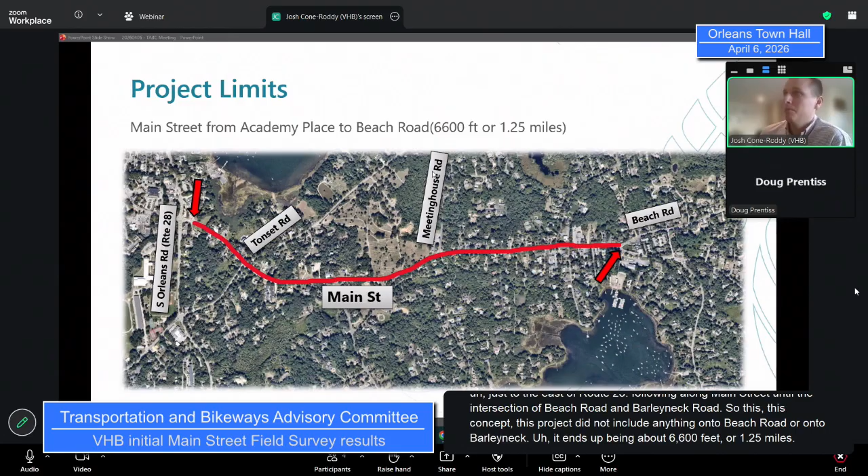A little bit of project status and history, since this has honestly been going on for a while now. We were originally hired back in 2021 to look at Main Street in this area. In 2022, we basically held as the town sewer project was ongoing and they were getting survey throughout the entire area for us to use, so we were waiting and staying pat. In 2023, we provided the three typical sections to the town. The preference at that time was to go with alternative 1.

We'll get to more information on these alternatives in a few minutes, but alternative 1 was the on-road bike lanes with the sidewalk on the north side of the roadway. Then in 2024, we revisited this with you all on the committee and progressed our alternatives analysis to include both alternative 1 and alternative 2, which is the sidewalk on the north side with sidewalk/path on the south. We also decided at that time to eliminate alternative 3, which was on-road buffered bike lanes. Last January, we submitted the alternatives analysis to the town. Later in December of 2025, the town hired VHB to go out, our survey department, to reestablish the right-of-way along Main Street, and then reanalyze the impacts based on that new reestablished right-of-way.

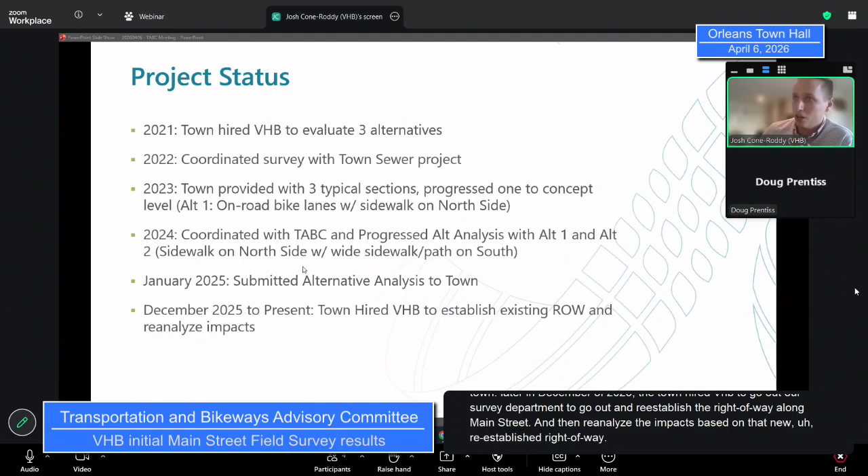So just a reminder what the existing roadway layout looks like - there is some variability along the corridor, it's not a perfect shot the entire way, but for the most part it's two 11-foot lanes, 3-foot shoulders, and some areas are smaller, some bigger than that. There's a 5-foot sidewalk on the north side of the roadway, but that's not continuous throughout the project study area. It's continuous for the western portion of the project, but becomes intermittent as you get towards the east, towards Beach Road. There's also a large amount of utility poles lining that north side of the road continuously throughout this mile plus.

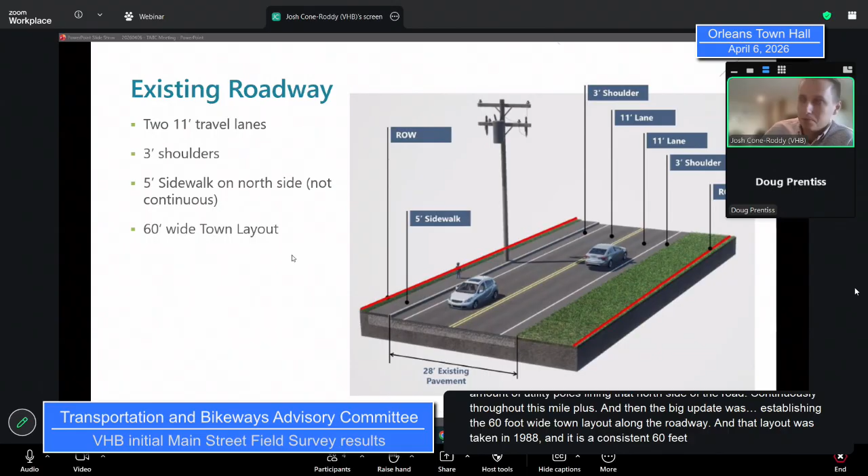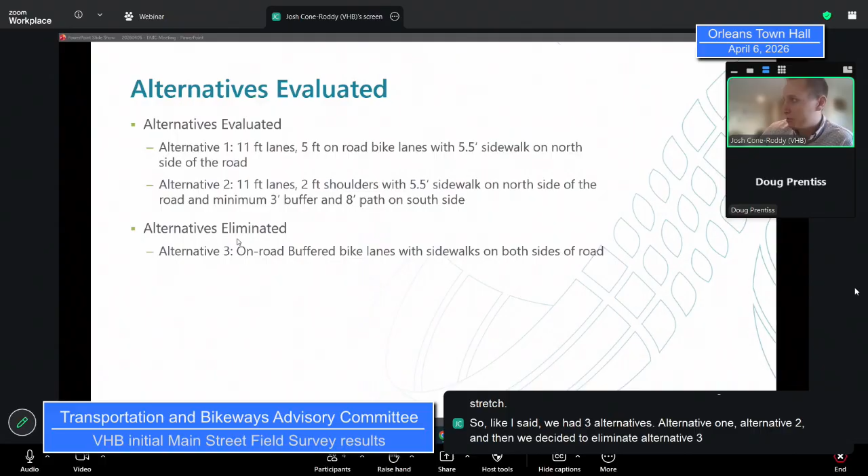And then alternative 2, which would be to condense that pavement down to 26 feet. So you're looking at 2 11-foot lanes, 2-foot shoulders on each side, keeping that 5-foot sidewalk on the north side, but then having a path or sidewalk on the south side.

What I show on the screen here is the preferred minimum when you're talking about MassDOT standards or design standards, that 5-foot buffer between the roadway and the path, and then a 10-foot minimum path. What I've shown previously, and what we continue to show on these graphics, is also a minimum path, which has a reduced 3-foot buffer and an 8-foot lane or an 8-foot path.

This would be used in constrained areas where we wouldn't be able to fit that full 15 feet. So any of the impacts that we counted for as part of the original alternatives analysis for right-of-way takings, tree impacts, or any other impacts, was based on that kind of minimized section, where we would use that rather than impact people's properties or trees where we could.

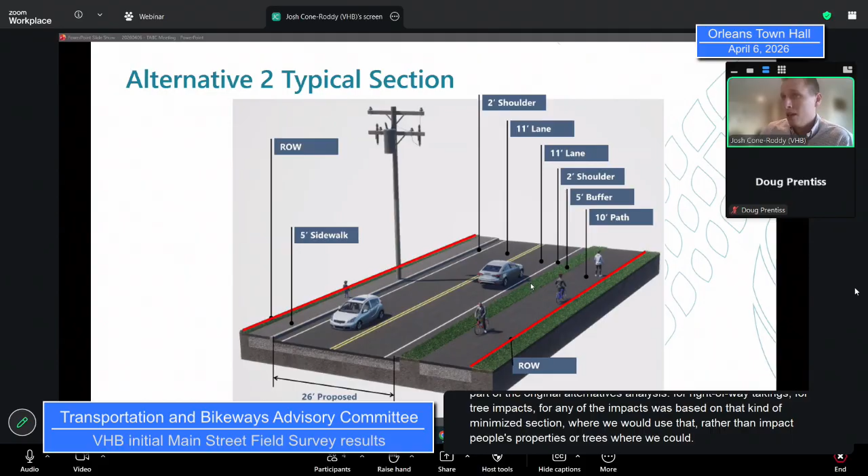So in December, we got hired. Our survey crews found some time throughout the winter, when there wasn't 5 feet of snow on the ground, to go out there and find the existing bounds and establish those bounds so that they could then re-establish the existing town layout in CAD for us to use.

For those of you who have been on this committee for this long, I've said over and over again that the GIS layout lines are sometimes spot on, and sometimes significantly off in one direction or another. So it's hard to give great direction off GIS layout lines.

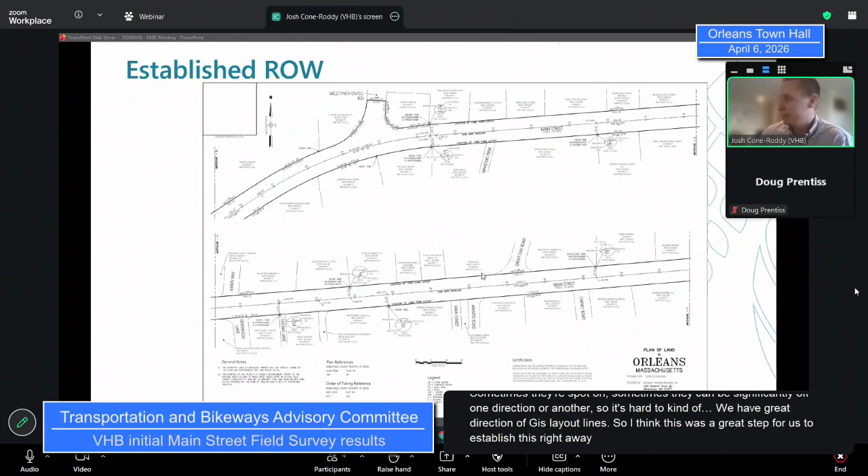So I think this was a great step for us, to establish this right away and make some confident decisions based off of it. When I was saying that, here's an example of it.

So this purple, magenta line here - I apologize if it's a little light on the screen for you guys - is what we had done our first analysis off of, which is the GIS layout lines that come in from the downloads from the town information.

And then the red here is the actual town layout line that we established with our right-of-way crew. So you can see there's a pretty significant difference there between what we looked at and analyzed - at least a 5-foot, 6-foot, upwards of probably 10 feet gap in some areas, between what you get off of GIS versus what the town actually owns.

Again, on the bend you can see it's kind of spot on through here, but when you get into this curve heading east of Tonset, again, there's a pretty sizable gap there between what GIS would say versus what the town actually owns.

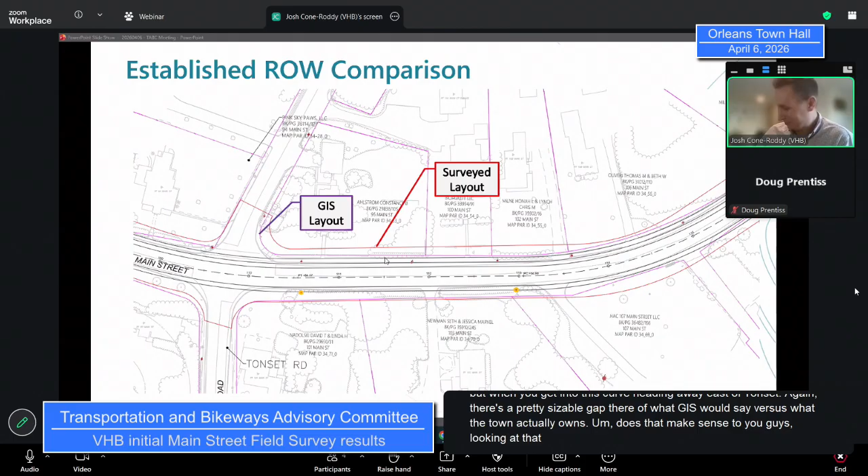Does that make sense to you guys, looking at that quickly? Yeah. Yep. Yes. Yeah.

What we found going through with the actual right-of-way is that in both alternatives, the only impact we were seeing to permanent right-of-way was in one location, and that was actually at the town cemetery located right across from town hall there, where you guys all are.

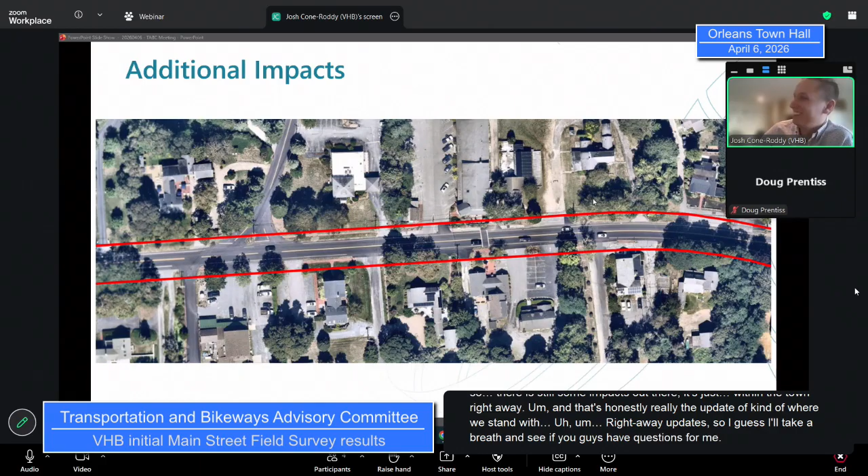Any questions? Now, wait a minute. Telephone poles? I'm sorry. Josh? What was that? Telephone pole impacts?

Yep, so those are unchanged. We would still be expecting about 5 relocations for alternative one. Alternative two, we would still be expecting about 11. So each has impacts to utility poles out there.

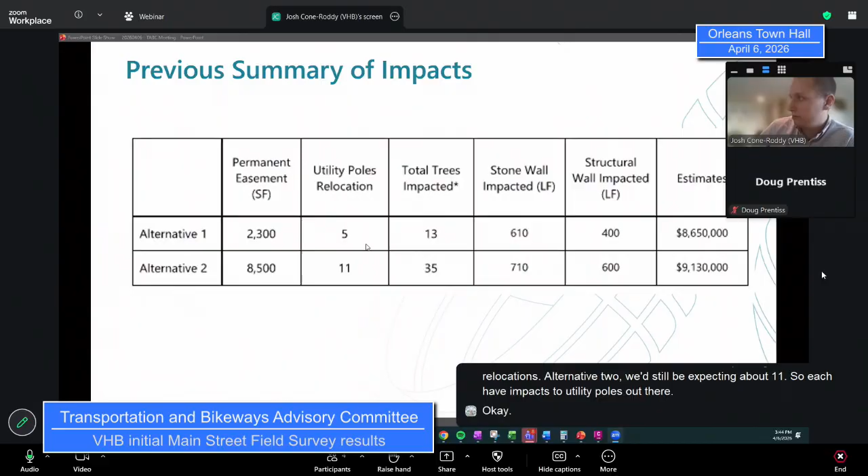Okay. Not so much a question as much as a comment. Thanks for this update, Josh. I think one thing we should be thinking about in terms of what we might want to push forward as a recommendation is what we're connecting to and from.

So we have this stretch bookended by Beach Road on one end and downtown on the other end. Thinking about whatever we do in this section, I think we want to think about continuity. We've had lots of discussions about Beach Road, and I think having a separated, shared use path would be nice. I just don't know that it gets us where we want to be.

I think one of the things we all heard as part of the Beach Road discussion is minimize impacts. It's very similar to other discussions other towns have about sidewalks when they build them. So I think continuing to minimize our impacts, thereby minimizing our cost, regardless of how much we own.

The good news is it looks like we own a pretty good section of real estate through here. So getting our sidewalk, and even just a 5-foot shared use path or shoulder, would really make a meaningful difference for this section of town.

We were concerned about the back of our existing sidewalk and whether we had room to expand it. It looks like we do. So redoing the sidewalk where it exists on the north side of the road isn't all that hard. It's going to be costly, yeah, but it's really kind of a footprint job. We're working within the same footprint as before, maybe expanding it a little bit.

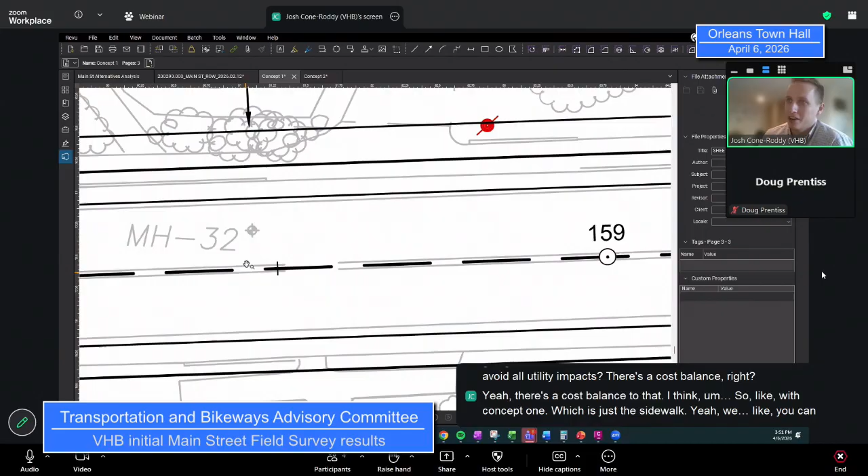With concept one, which is just the sidewalk, you can kind of see the gray here, that was where the center line is. So we're basically just splitting the center line there, keeping it more or less where it was. We could look, especially if we're not doing the 5-foot shoulders along here, at balancing it one way or another to avoid additional impacts. But the intent was to keep that center line more or less where it was.

I'm just scrolling through some of these right now, listening to you guys, but even with getting the sidewalk in with the utility poles, here is a situation right in front of the playhouse, basically. So that's what this image looks like, with that utility pole that's basically almost in the roadway now.

So in a situation like this, it might make sense for us to scooch this roadway over a little bit so we could get this utility pole fully out of the roadway. So there are areas like that we would look at, making sure this is ADA compliant, so we could get a pedestrian through here with at least 36 inches for that.

And coming up here, this is going to be a situation where I think you guys mentioned this at a meeting - the town owns this and there is a sidewalk there now, but with these hedges growing and the utility poles on either side of it, it's not really a comfortable or usable sidewalk. So we'll have to look at engineering in situations like this for the best way to get a usable path for people along this roadway.

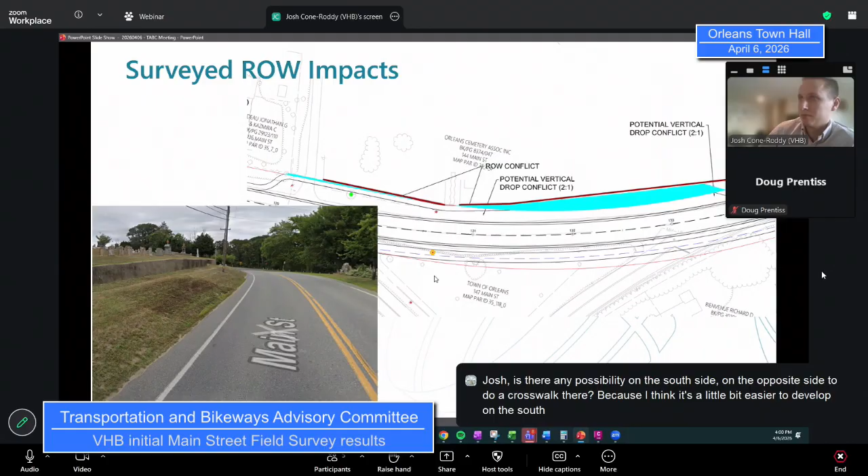Josh, is there any possibility on the south side, on the opposite side, to do a crosswalk there? Because I think it's a little bit easier to develop on the south side right there, and there's some green space. There is, you can't see it in that picture, but yeah.

So there's a pretty straight shot. We could look at potential areas for crossings, as we get into a design.

The only not great thing about putting it on the south side here is that River Road and School Road both have pretty significant crossings for a pedestrian. Neither kind of forces cars to decelerate to take this right turn onto River Road, or even this right turn off of School Road, even though there is a stop line there. So cars can take that at speed. So these crossings aren't ideal for a sidewalk here, but we could look at potential opportunities for crossing the road where it made sense and going on the other side.

One thing we've discussed is reworking three or four intersections on Main Street: Barley Neck, Beach Road, where River Road comes through, Meeting House, which is kind of wonky, and Tonset. But we don't want to increase the cost of the sidewalk project by including reworking these intersections, making people think the sidewalk is creating those costs when it's not. So Calvin, should we address the sidewalk as just the sidewalk and deal with intersections later, or from DPW's point of view should we be more comprehensive and include that now?

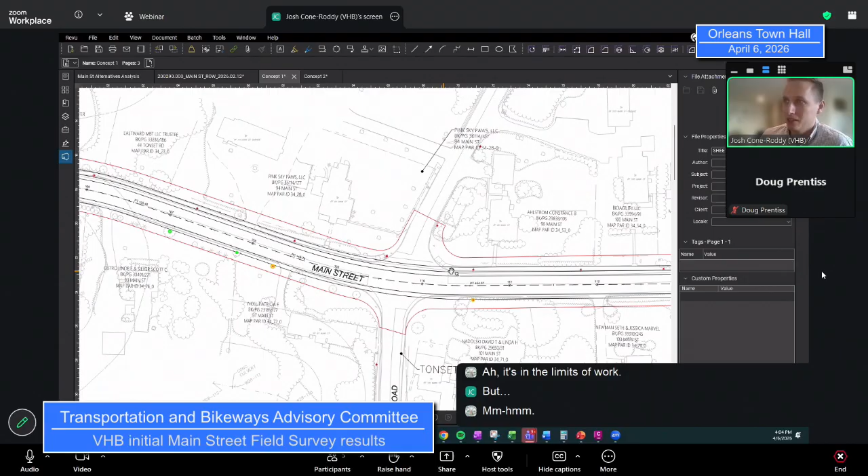Okay, but none of that is being taken into consideration with what Josh is showing, right? What he's showing is just sidewalk costs. We see the space we've got, but have we addressed what those intersection costs would be, or are they included? I defer to Josh. I think we did have some costs for the limits of work, some assumed intersection upgrades. I don't think we assumed major reconstruction, but shifting curb lines and updating timings or equipment potentially. I think those were in those costs.

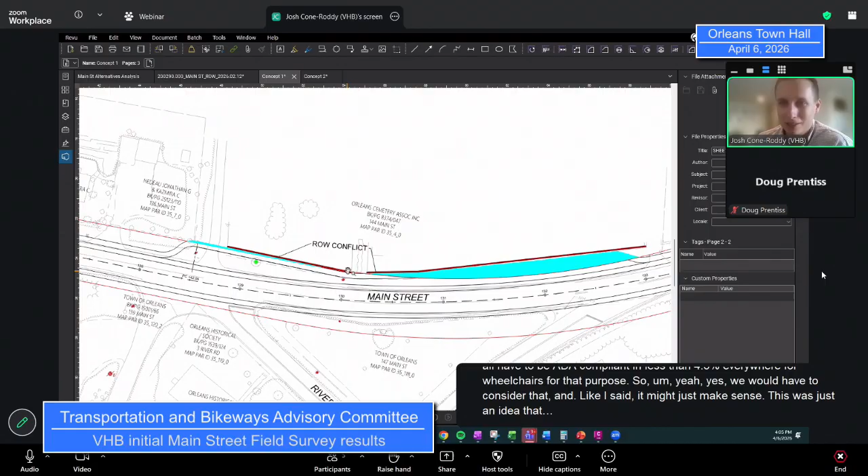Josh, on the cemetery question, if we stay with the profile of the sidewalk where it is now at the top, doesn't that make it really difficult for people with a wheelchair? Would that argue for going down at the lower option? We just showed this horizontally for now. This would all have to be ADA compliant and less than 4.5% everywhere for wheelchairs, so yes, we'd have to consider that. It might just make sense. This was just an idea we came across in 2021 or 2022, and we haven't really updated it since. Once we get to actual design, we'd look at the best place for this sidewalk.

Please remind me, who pays for relocating the utility poles? Is that the town? Yeah. It's never going to be Verizon. Challenging process, yeah.

I think even the way it's shown here might not quite work for grade. That might be a long grade arm to make that work, because it's pretty steep coming up that slope. I think that would have to be analyzed. I think a lot of the questions we're asking are design-pointed questions, and that would be part of the process. But we're anxious, so I know what we're getting at.

I have one other question that keeps coming up fast: we've got Eldredge Park Recreation Area that's going to be a huge draw, plus the elementary school and middle school are right there. In all of this, we're addressing Main Street but not Tonset Road Extension, which is going to be the natural path for walkers, kids, and kids on bikes. I wonder what everybody would think about adding Tonset Road Extension into this project. Is that foolish, or would it price us right out of consideration for the town? Chief, would you have an idea in terms of safety for children and pedestrians in that area? Yeah, I think that's a no-brainer. Putting sidewalks into Tonset Extension is going to reduce the risk of collisions or general conflict. So, yeah, absolutely, whether or not we can fit it into this project, this town is facing a lot of big-money tickets.